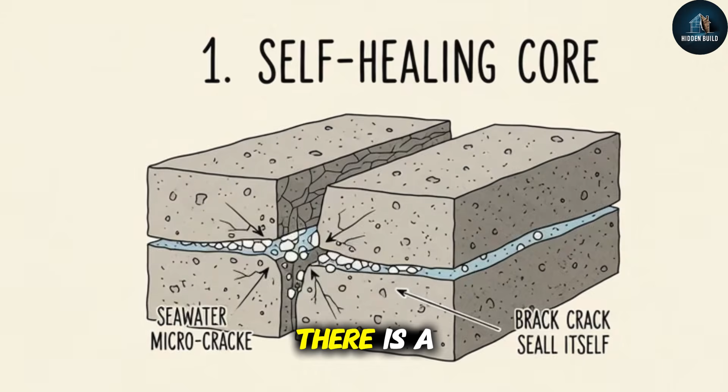There is a concrete that repairs its own cracks. It gets stronger in seawater, and once you build with it, the structure never needs replacing. For 2,000 years, it has held up domes, harbors, and walls without a single repair.

Then we replaced it. We swapped it for a concrete that crumbles in 50 years. We did not stop using it because it failed. We stopped because concrete that lasts forever is concrete they cannot sell. A material that heals itself eliminates the need for repair contracts, replacement cycles, and an industry worth $400 billion a year.

And what cannot be sold on a schedule cannot sustain a profit model. This is the story of the Roman formula that built an empire, survived 2 millennia under the sea, and still stands while everything we pour today is already cracking.

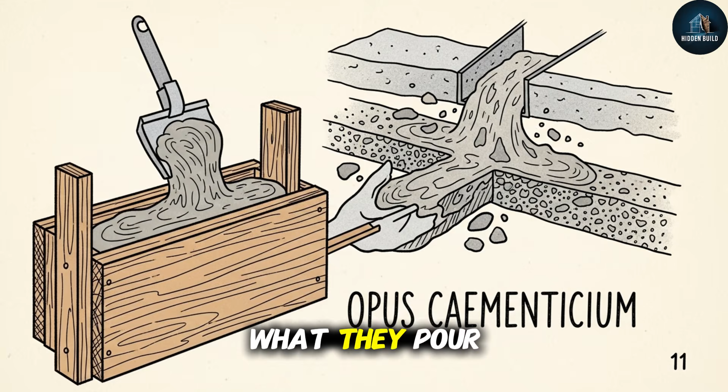The history begins on the shores of the Bay of Naples, roughly 300 years before Christ. Roman builders are experimenting. They take volcanic ash from the fields near Pozzuoli, a town sitting in the shadow of what will one day become Vesuvius. They mix it with lime and chunks of rock. They add seawater. What they pour does not just harden, it transforms.

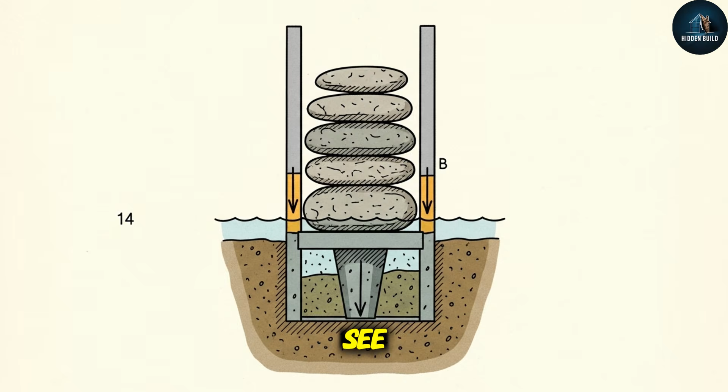The Romans call it opus caementicium. The ash they use becomes known as pozzolana, named for the town where they dig it. No one alive fully understands why it works so well, but the builders know what they see. The material bonds to itself. It sets underwater. It holds weight that stone alone cannot, and it does not crack.

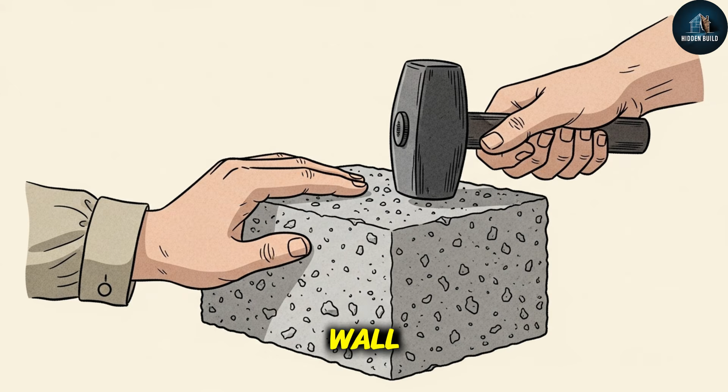A builder places his hand against a freshly cured wall. It is cool to the touch, dense, unyielding. He strikes it with an iron tool. It does not chip. It does not flake. It rings. Within a generation, Roman engineers realize what they have.

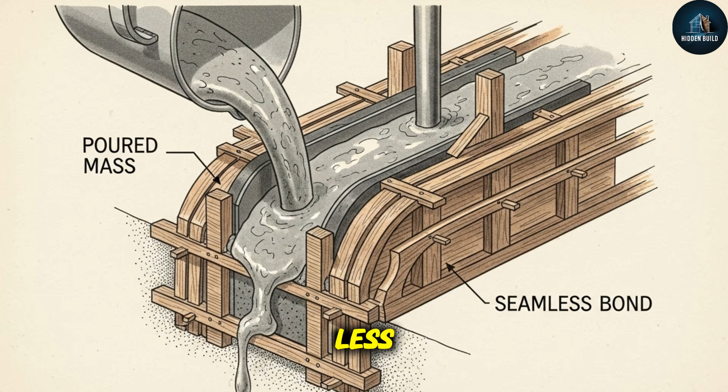This is not mortar. This is not plaster. This is something entirely new. A material that can be poured into any shape, that sets like stone but weighs less, that bonds to itself across joints and seams as though it were one continuous mass.

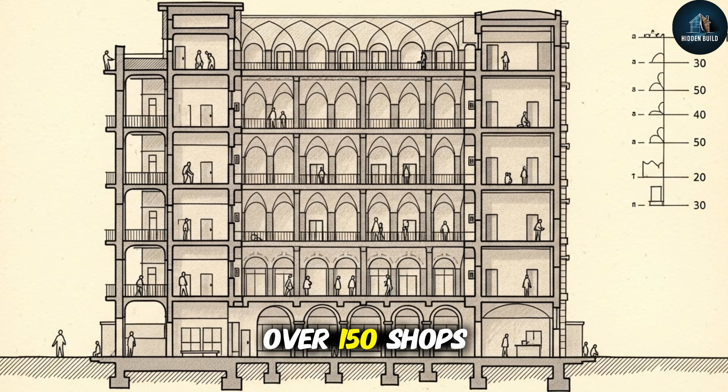By the 1st century, they are pouring this concrete into the most ambitious structures the ancient world has ever seen. Trajan's markets rise in Rome around 110 AD, a complex of over 150 shops and offices, 6 stories high, built with concrete vaults that still stand today.

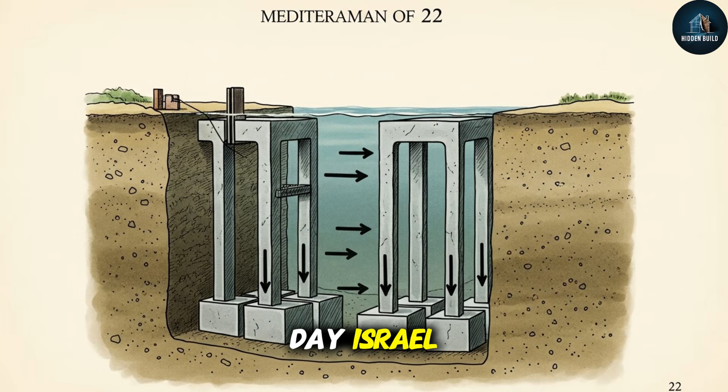The port of Caesarea, in modern-day Israel, is constructed with massive concrete piers sunk directly into the Mediterranean. Seawater does not weaken them, it makes them stronger. At Baiae, on the Italian coast, entire harbor structures are submerged and remain intact century after century.

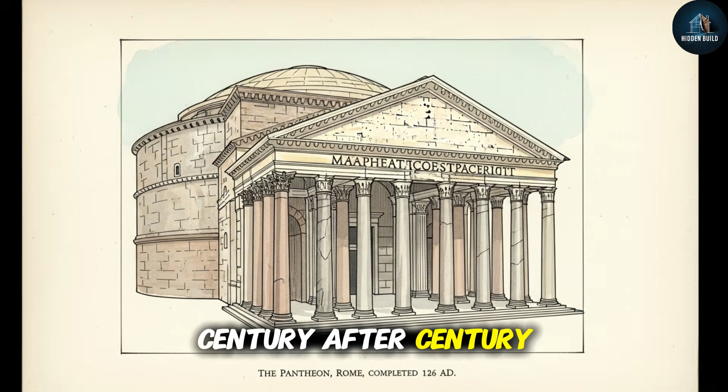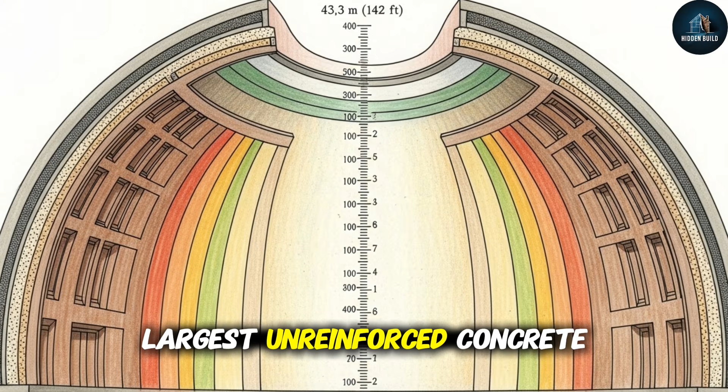Then comes the Pantheon, completed around 126 AD under Emperor Hadrian. Its dome spans 43.3 meters across. It is the largest unreinforced concrete dome ever built. No steel, no rebar, no modern reinforcement of any kind. Just Roman concrete shaped into a perfect hemisphere with an open oculus at the top that lets in rain and light.

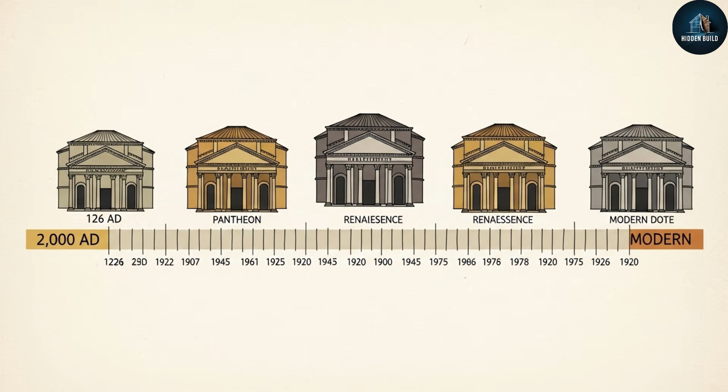2,000 years later, it has never been structurally repaired, not once. Engineers today cannot fully explain how it has survived earthquakes, floods, and centuries of weathering without a single failure. But the man who first wrote down the recipe tried to tell us.

His name was Marcus Vitruvius Pollio. Around 30 BC, he completed a text called De Architectura, 10 books on building. In it, he described how Roman builders selected their pozzolana, how they mixed their lime, and how they cured their concrete slowly over weeks and months.

Pliny the Elder, writing decades later, documented the specific volcanic ash deposits near Pozzuoli that gave the concrete its power. These men recorded a formula that would outlast their civilization by 2,000 years.

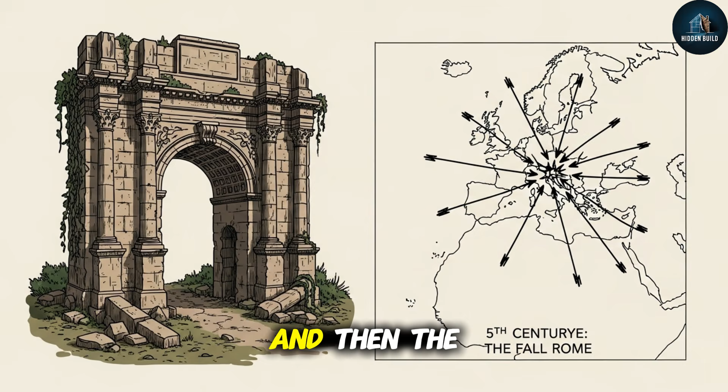And then the civilization fell. Rome collapsed in the 5th century. The trade networks that moved pozzolana across the empire broke apart. The skilled builders who understood hot mixing and slow curing scattered or died.

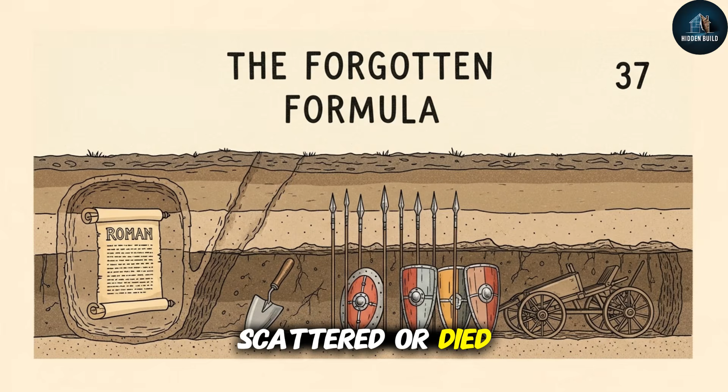The formula was not destroyed. It was simply forgotten. Buried under centuries of war, migration, and reinvention. Europe built with stone and timber for the next 1,400 years. The knowledge slept. The secret was fire.

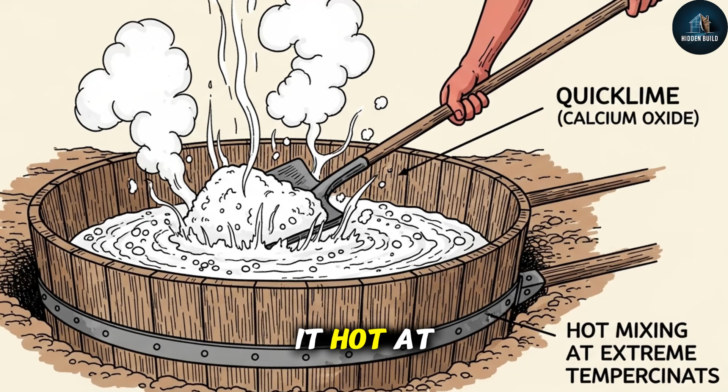Roman builders did not just mix volcanic ash with lime and water. They used quicklime, calcium oxide, and they mixed it hot at extreme temperatures directly into the wet concrete. This was not gentle blending. It was a violent reaction.

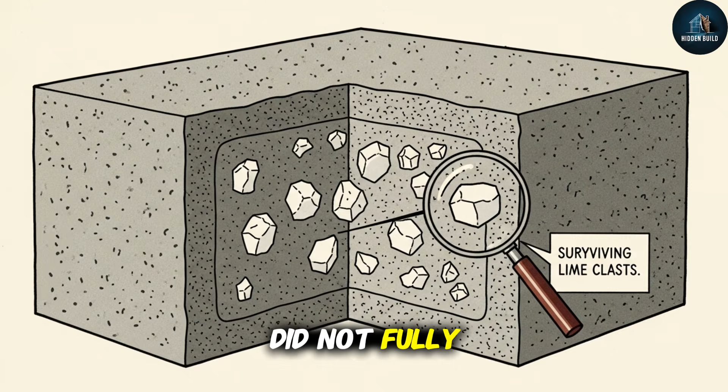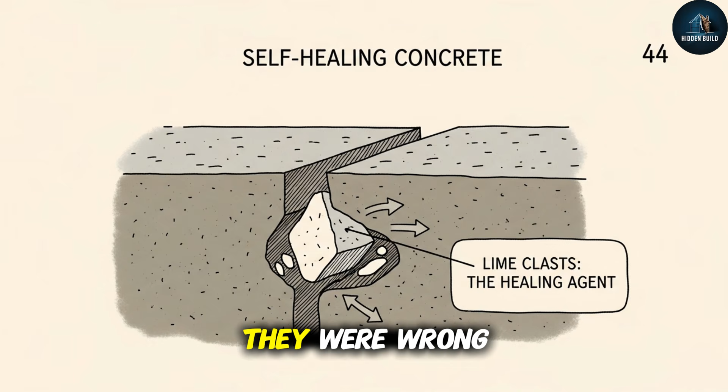The quicklime did not fully dissolve. Tiny white chunks survived in the mixture. For 2,000 years, scientists assumed these were flaws, sloppy mixing by ancient workers. They were wrong. Those chunks are lime-clasts, and they are the reason Roman concrete heals itself.

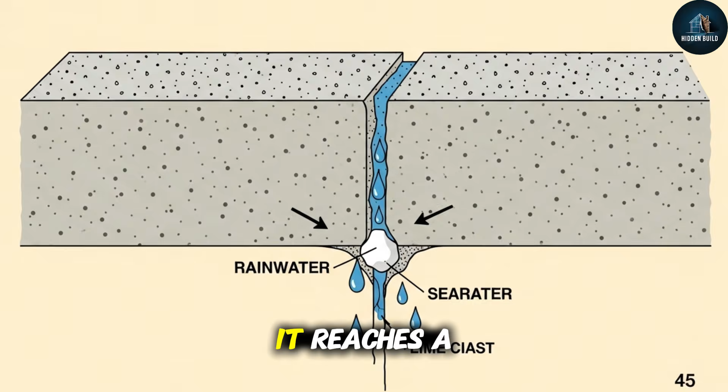When a crack forms in Roman concrete, rainwater or seawater seeps in. It reaches a lime-clast and dissolves it.

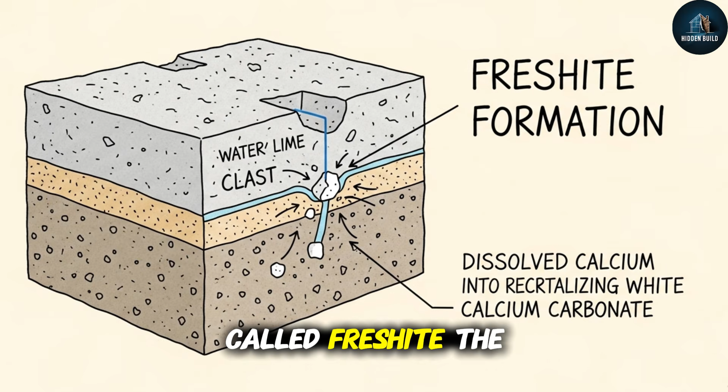The dissolved calcium migrates into the crack and recrystallizes as calcium carbonate, called calcite. The crack seals itself. No human intervention, no repair crew, no cost. The concrete fixes its own wounds and keeps going. This is not a metaphor.

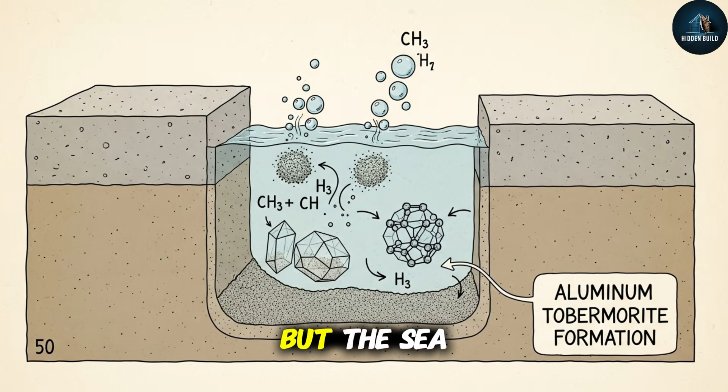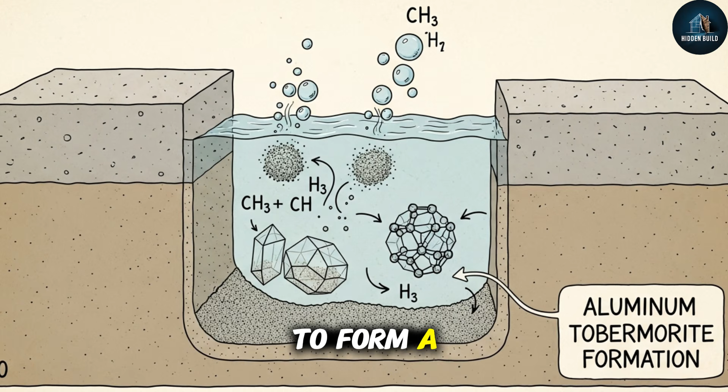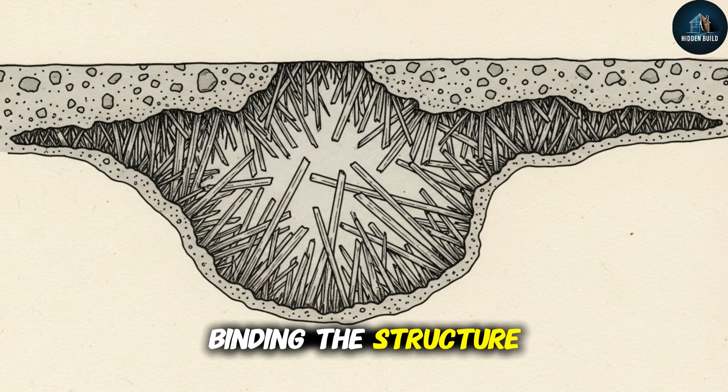This is chemistry, measured and confirmed in a laboratory at MIT in 2023. But the seawater reaction is even more extraordinary. When Roman concrete sits in the ocean, volcanic ash reacts with the salt water over decades and centuries to form a mineral called aluminum tobermorite. This mineral is extremely rare in nature. It grows inside the concrete, filling voids and binding the structure tighter. The concrete does not degrade in seawater. It mineralizes. It becomes harder, denser, more resilient with every passing century.

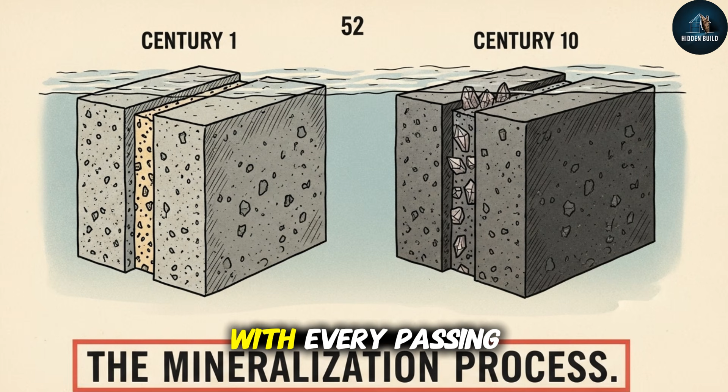This is why the harbor at Caesarea is still intact after 2,000 years submerged in the Mediterranean.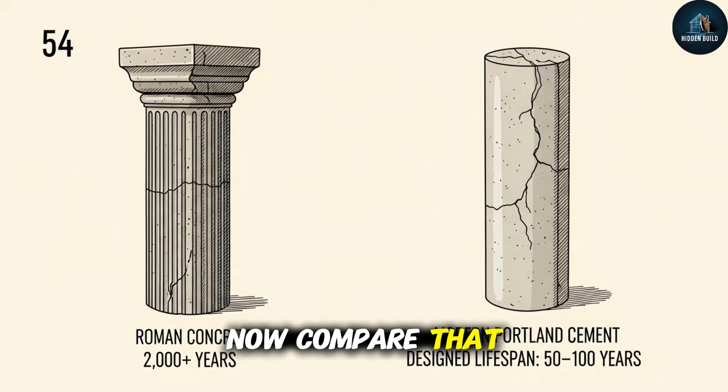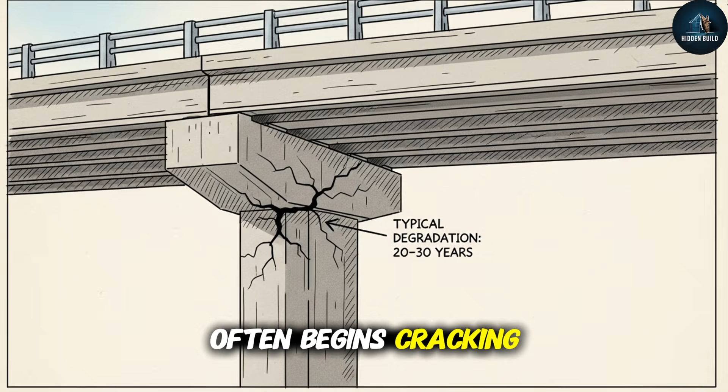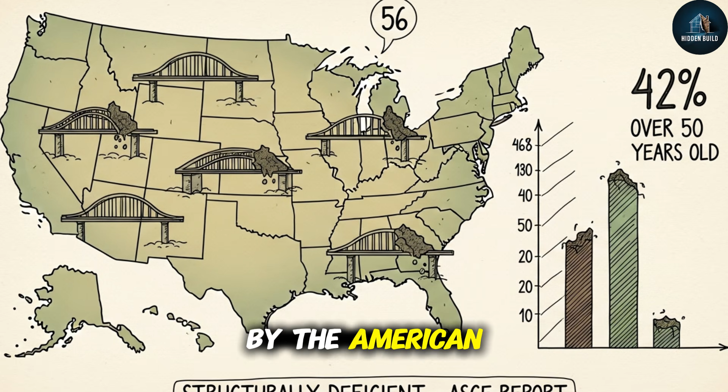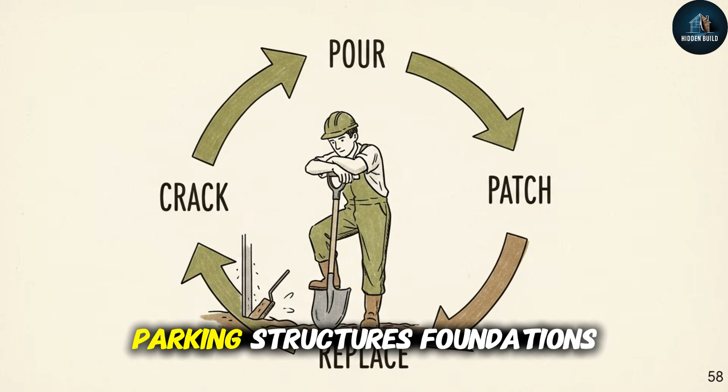Now compare that to what we build with today. Modern Portland cement has a designed lifespan of 50 to 100 years. In practice, it often begins cracking within 20 to 30 years. 42% of bridges in the United States are over 50 years old and classified as structurally deficient by the American Society of Civil Engineers. The country spends $4.6 billion every year just on concrete repair. Highways, bridges, parking structures, foundations, pour, crack, patch, replace, pour again.

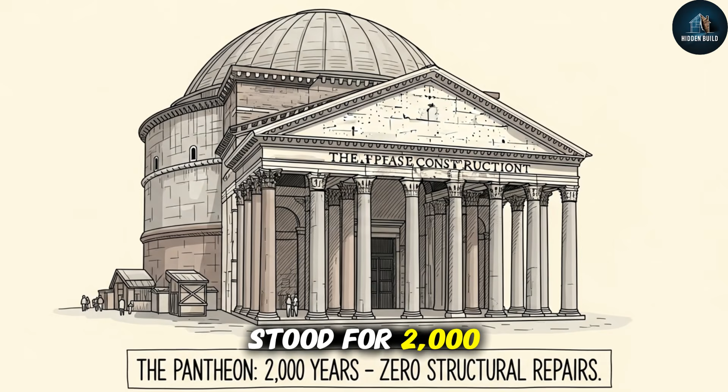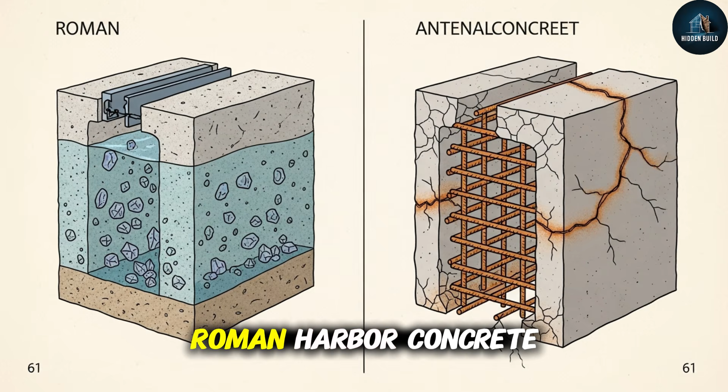The cycle never ends. The Pantheon has stood for 2,000 years without a single structural repair. The Hoover Dam, one of the most celebrated engineering achievements of the 20th century, is already showing cracks at 90 years old. Roman harbor concrete gets stronger in seawater. Modern concrete exposed to salt water begins corroding its internal steel reinforcement within decades. The numbers are not close. They are not in the same category.

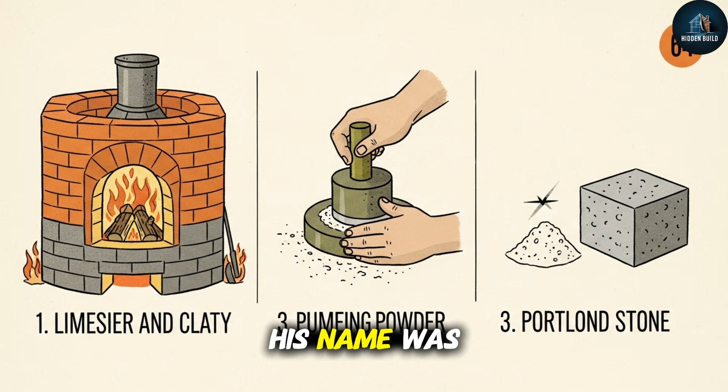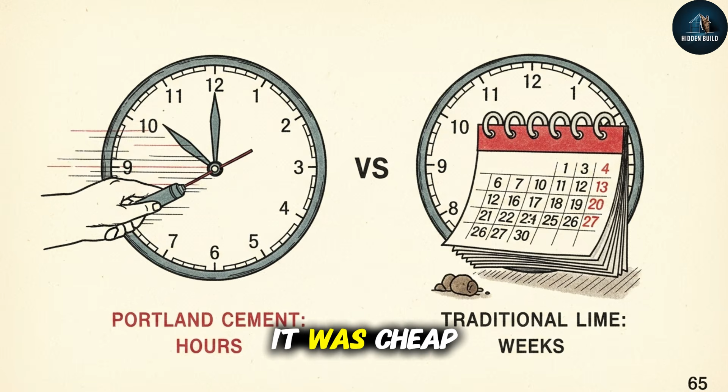Then, in 1824, a bricklayer in Leeds, England, changed everything. His name was Joseph Aspdin. He heated limestone and clay in a kiln, ground it into powder, and patented what he called Portland cement, named because the color resembled Portland stone. It was cheap. It set fast, in hours instead of weeks. It could be manufactured in a factory and shipped anywhere. It did not require volcanic ash from a specific region. It did not need seawater or slow curing or skilled hands that understood ancient chemistry. It needed a kiln, limestone, and a bag.

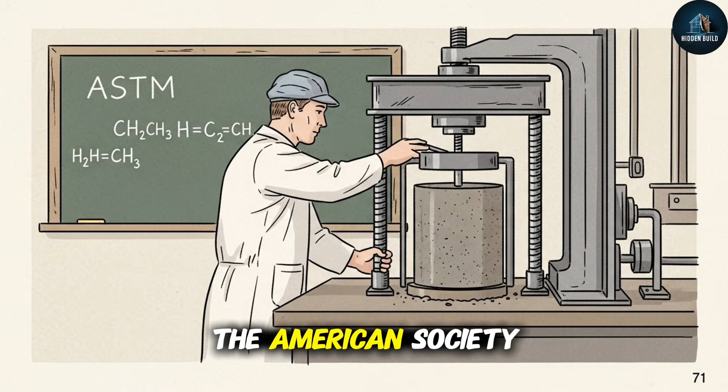By 1900, Portland cement had conquered the world. Every building code, every engineering standard, every construction manual was rewritten around it. The American Society for Testing and Materials, ASTM, built its concrete specifications entirely on Portland cement chemistry. The Portland Cement Association, founded in 1916, lobbied governments and shaped regulations for over a century. Try to get a building permit today for a foundation poured with pozzolanic lime concrete. In most jurisdictions, you cannot. The codes do not recognize it. Not because it fails testing, but because it was never included in the testing framework.

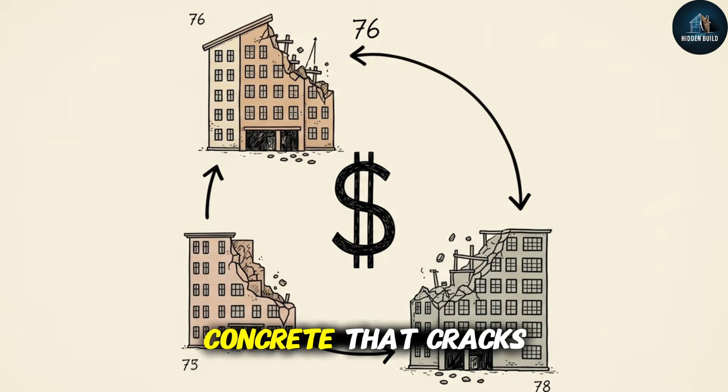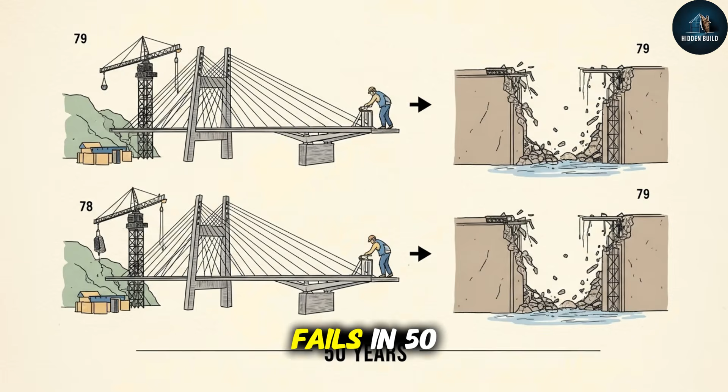This is the replacement cycle that built a $400 billion global industry. Concrete that cracks in 30 years creates perpetual demand for repair and replacement. A bridge that lasts 2,000 years is a bridge you build once. A bridge that fails in 50 is a bridge you sell twice in a century. Multiply that across every highway, every foundation, every parking garage, every skyscraper on Earth, and you begin to see the economics. Permanence is the enemy of profit. Durability is the enemy of dependency.

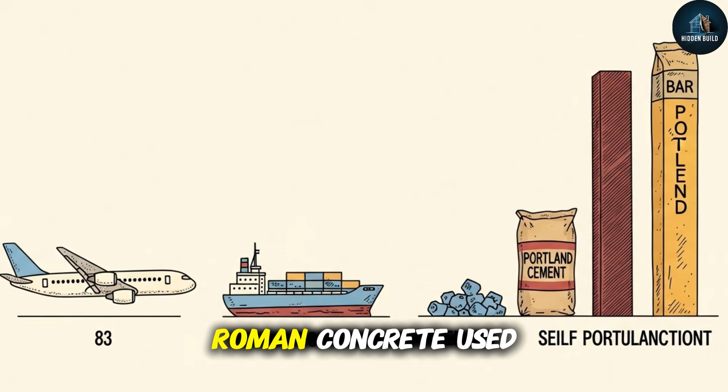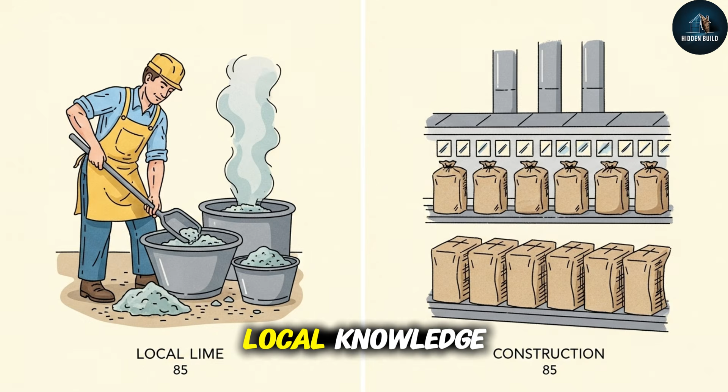And there is the carbon cost. Portland cement production is responsible for 8% of all global carbon dioxide emissions. 8%, more than aviation, more than shipping. Every ton of Portland cement releases nearly a ton of carbon dioxide. Roman concrete used less energy to produce, required no steel reinforcement, and lasted 40 times longer, but it was slower. It required local knowledge. It could not be stamped out of a factory line and sold by the truckload.

So we chose the worst material, not because it built better, but because it sold better. The knowledge was not lost, it was buried under industry standards, under lobbying, under a century of codes written to protect a supply chain, not a structure. Builders who wanted alternatives were told the science did not support them. That was a lie. The science was never funded because the industry never requested it. You do not commission research into a product that would destroy your revenue model.

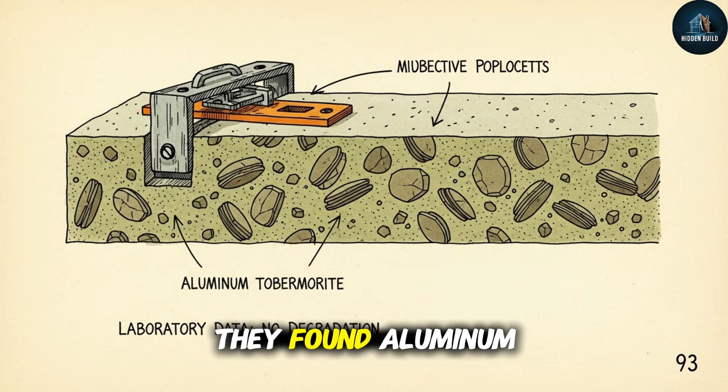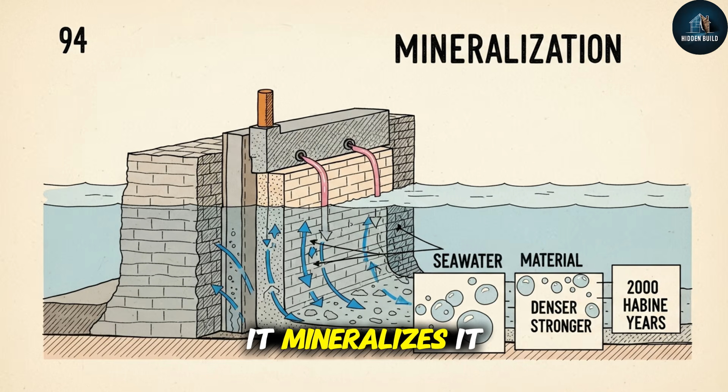But the evidence refused to stay buried. In 2017, a geologist named Marie Jackson at the University of Utah published a landmark study in the journal American Mineralogist. Her team examined Roman marine concrete samples pulled from the Mediterranean. They found aluminum tobermorite crystals growing inside the material. They proved with laboratory data that Roman seawater concrete does not degrade. It mineralizes. It becomes stronger over centuries. The concrete was not merely surviving the ocean, it was feeding on it.

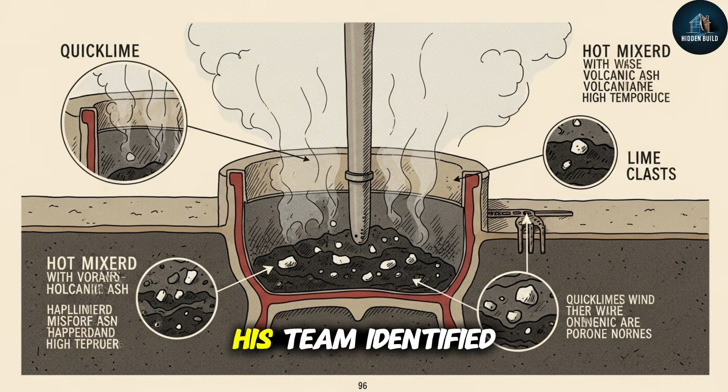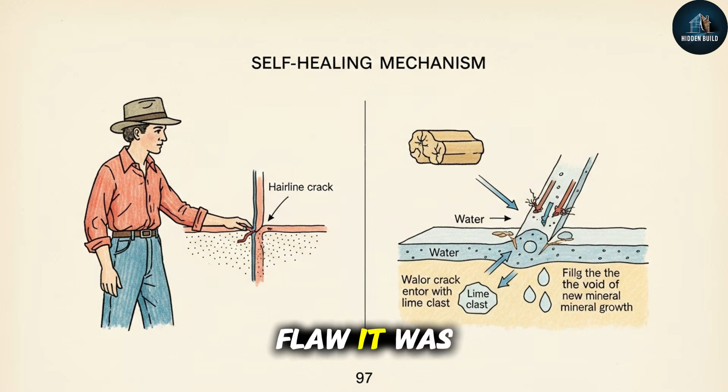In January 2023, material scientist Admir Masic at MIT published in Science Advances the discovery that changed everything. His team identified the lime clasts. They proved that the hot mixing technique, quicklime blended at extreme temperatures, was not a flaw. It was the mechanism. The self-healing ability of Roman concrete was not accidental. It was engineered 2,000 years ago by builders who understood their material better than we understand ours.

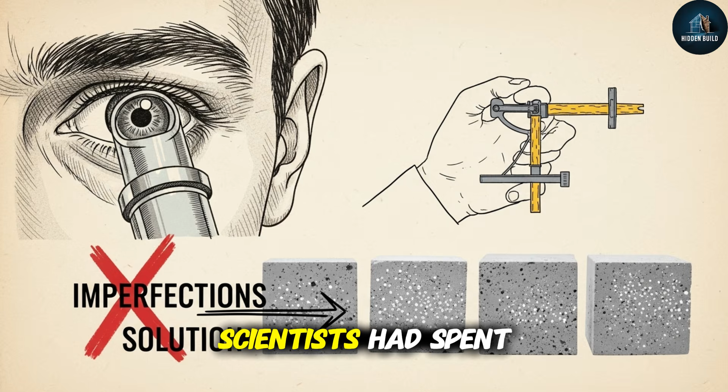Scientists had spent decades trying to decode Roman concrete. The answer had been staring at them the whole time: tiny white specks they had dismissed as imperfections.

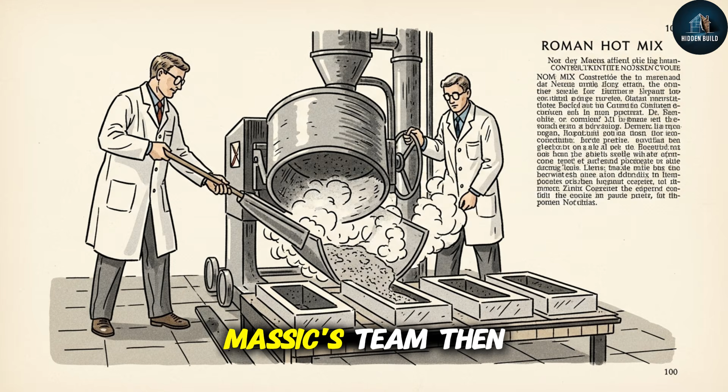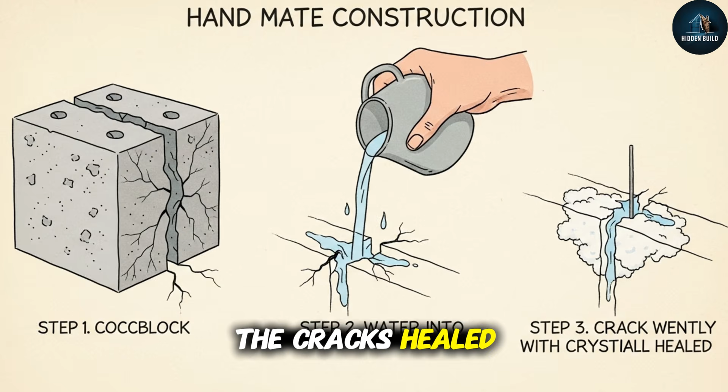Masic's team then tested it. They created modern concrete using the Roman hot mixing method. They cracked it, added water, and the cracks healed. The formula works. It is reproducible. It is not a mystery anymore. It is a recipe. But a few builders refused to forget.

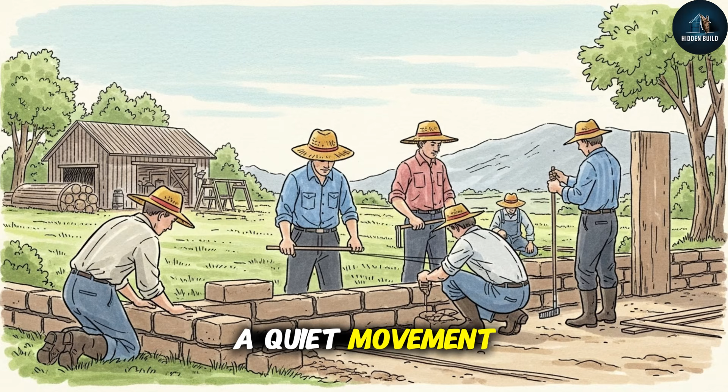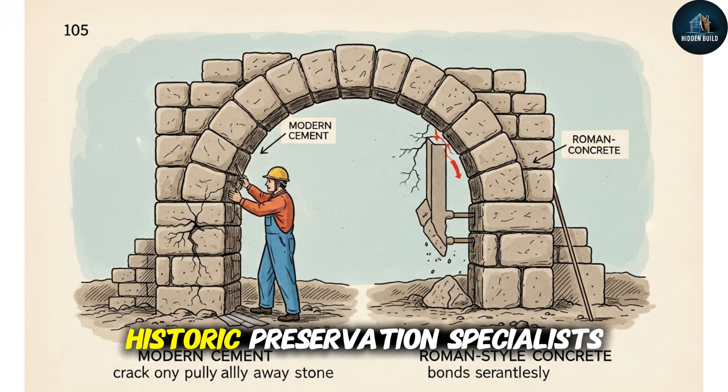Even before the MIT study made headlines, a quiet movement had been growing. Natural builders and permaculture designers had been using lime pozzolan mixes for foundations, root cellars, and water features for decades. Historic preservation specialists in Europe have long used Roman-style concrete to restore ancient structures, because modern Portland cement is too rigid and cracks when applied to old stone.

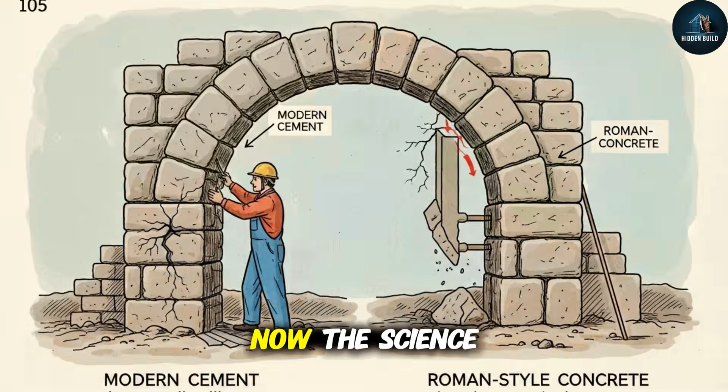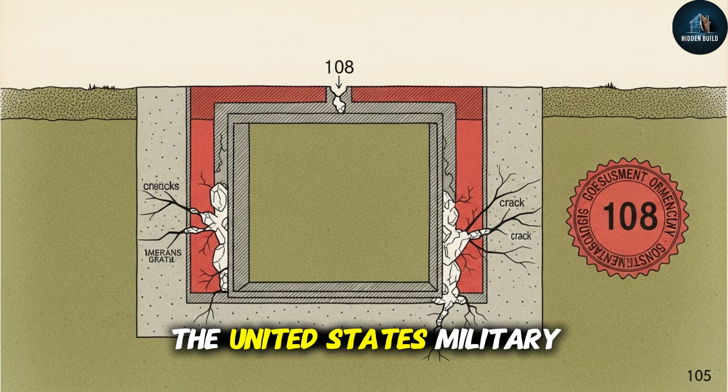Now the science has caught up. Multiple startups and university laboratories are developing Roman-inspired self-healing concrete formulations. The University of Cambridge is researching bioconcrete that uses bacteria to mimic the lime-clast mechanism. DARPA, the United States Military Research Agency, has funded self-healing materials programs for infrastructure that cannot afford to fail.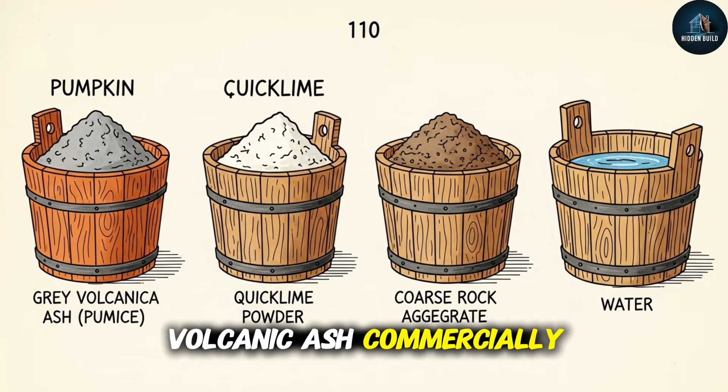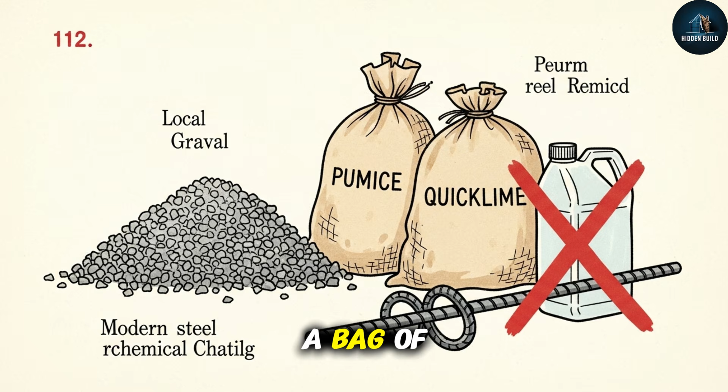And here is what matters to you: the basic Roman recipe is not complex. Volcanic ash, commercially available as pumice, quicklime, rock aggregate, and water. For a homestead foundation, a root cellar, a garden wall, or a water feature, the materials are accessible and the cost is a fraction of modern concrete. A bag of pumice, a bag of quicklime, local gravel.

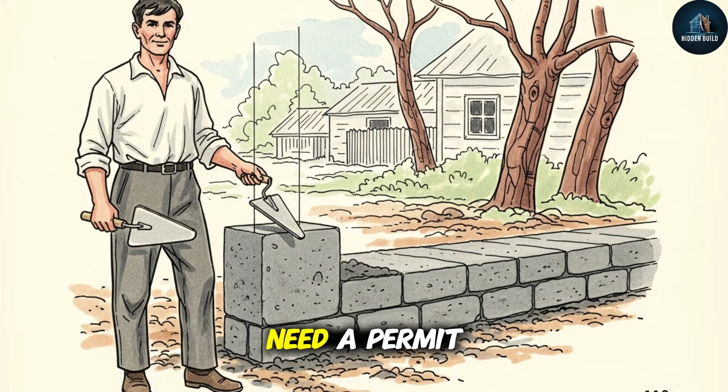No rebar, no chemical admixtures, no proprietary blends sold at contractor markup. You do not need a contractor. You do not need a permit for a garden wall. You need knowledge that has been available for 2,000 years and was proven again in a laboratory 12 months ago.

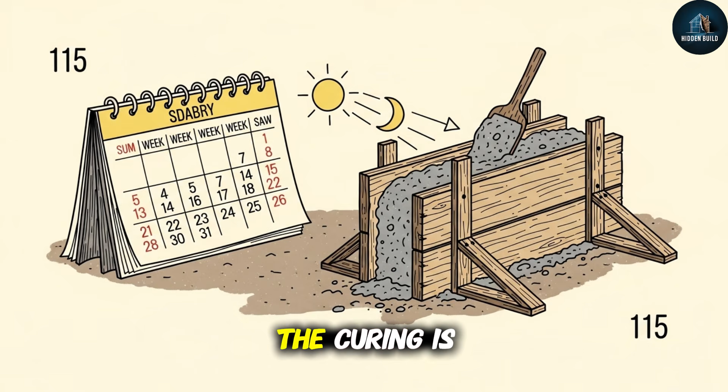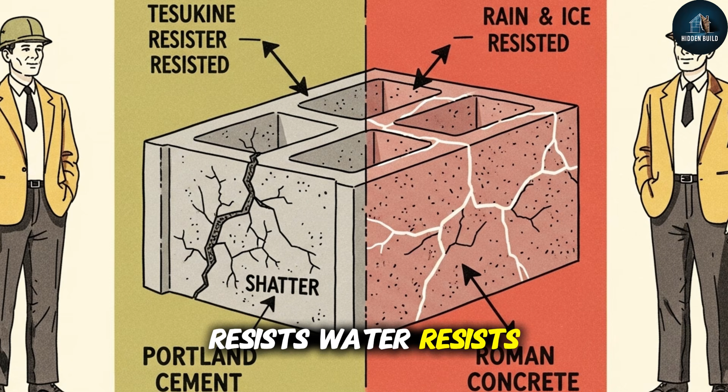The curing is slow. That is the trade. Roman concrete takes weeks to reach full strength, not hours. But what you get in return is a material that heals its own cracks, resists water, resists salt, resists freeze-thaw cycles that shatter Portland cement, and gets stronger with every passing decade.

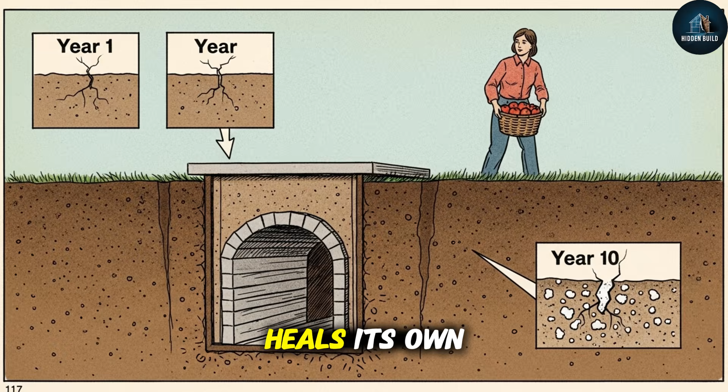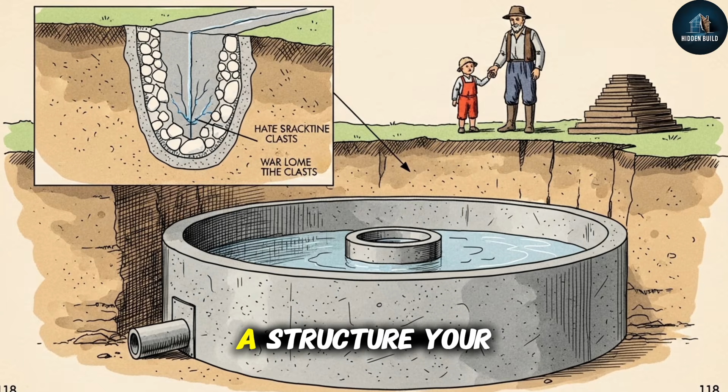A foundation that heals its own cracks. A root cellar that gets stronger every year. A cistern that seals itself when hairline fractures appear. A structure your grandchildren will never need to replace.

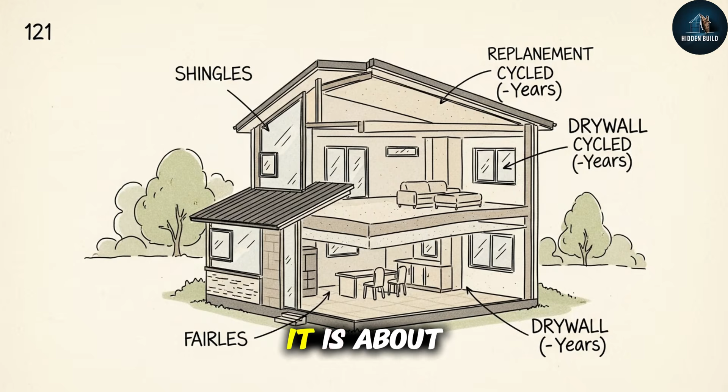That is what Roman builders had. That is what was taken from the building vocabulary and replaced with a material designed to fail on a profitable schedule. The housing crisis is not just about land prices and interest rates. It is about a construction system engineered for dependency.

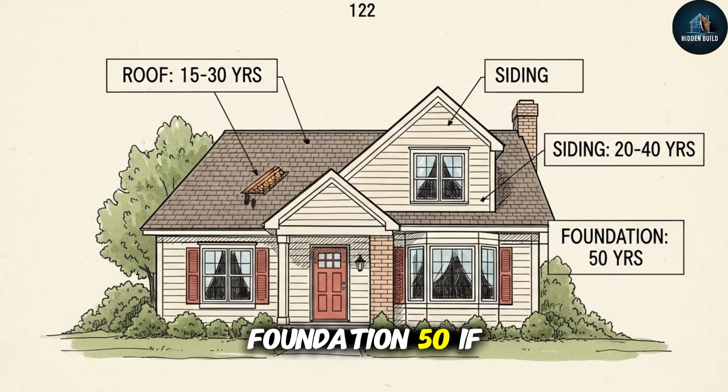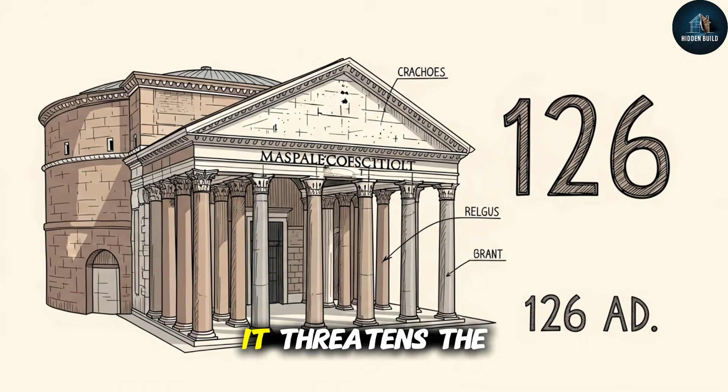Every material in a modern home has a replacement cycle. Roofing, 15 to 30 years. Siding, 20 to 40. Foundation, 50 if you are lucky. Every cycle is a transaction. Every transaction is a profit center. A home built to last 2,000 years breaks that model. It cannot be financed, insured, or sold the same way. It threatens the math that holds the industry together.

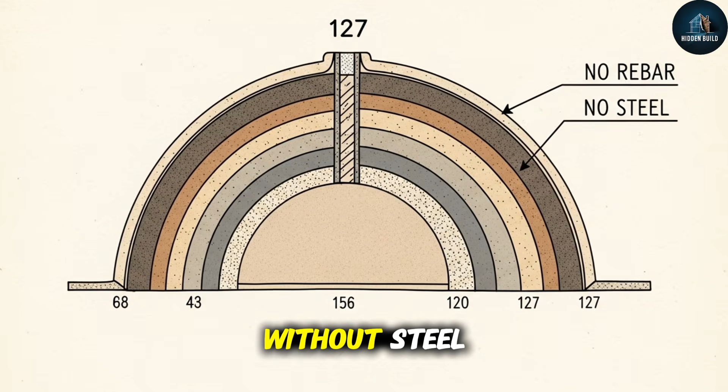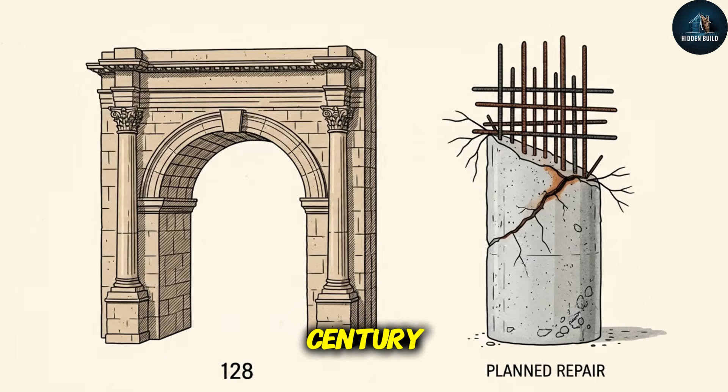2,000 years from now, the Pantheon will still be standing. The dome that Roman engineers poured without rebar, without steel, without a single material invented after the 1st century, will still hold. It will watch as the concrete towers we built in this century continue to crack, continue to crumble, continue to be repaired and replaced on schedule.

We did not lose Roman concrete because the formula was too complex. We lost it because it was too permanent. Because a structure that never fails is a structure that never needs the industry that profits from failure. The knowledge was not destroyed. It was buried under codes and contracts and a $400 billion supply chain.

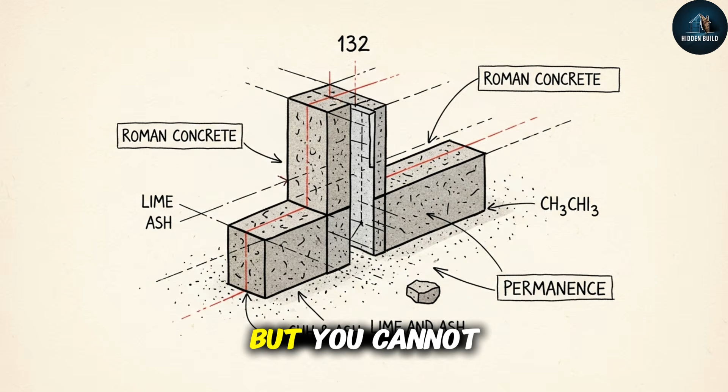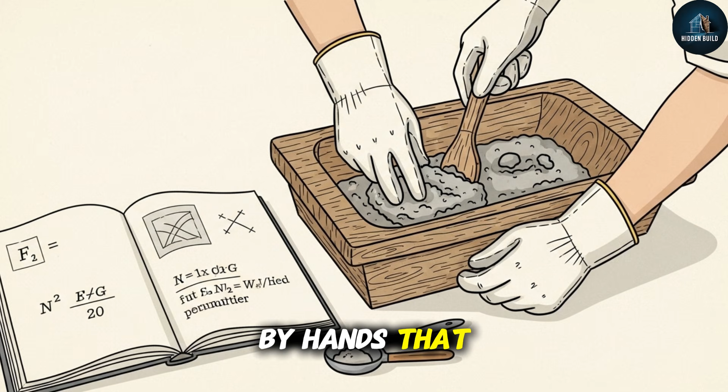But you cannot bury chemistry. You cannot erase what stone remembers. The formula is open. The studies are published. The concrete is waiting to be poured again by hands that understand what the Romans always knew. Build it once. Build it right. And it will outlast everything they pour to replace it.